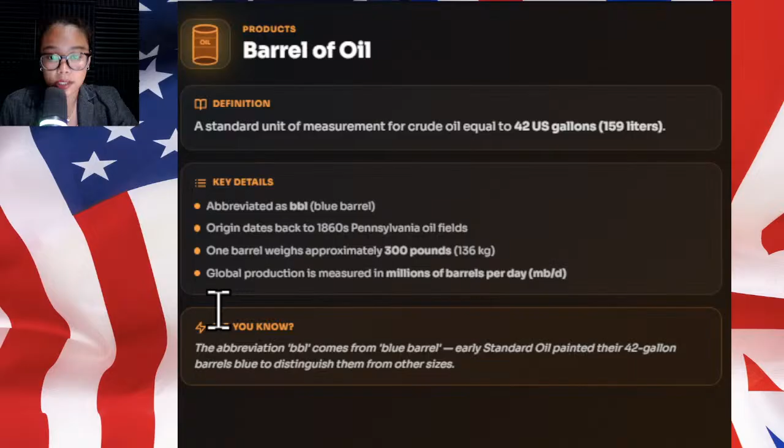And then next to that, we have blowout preventer. When we say blowout preventer, this is a critical safety device. BOP. This is very large. This is a specialized valve installed at the wellhead at the top. Okay, so it is more like an ultimate safety switch for an energy well. So its primary job is to seal, to control, and to monitor oil and gas wells, so that we can prevent uncontrolled release of pressure, which is known as the blowout.

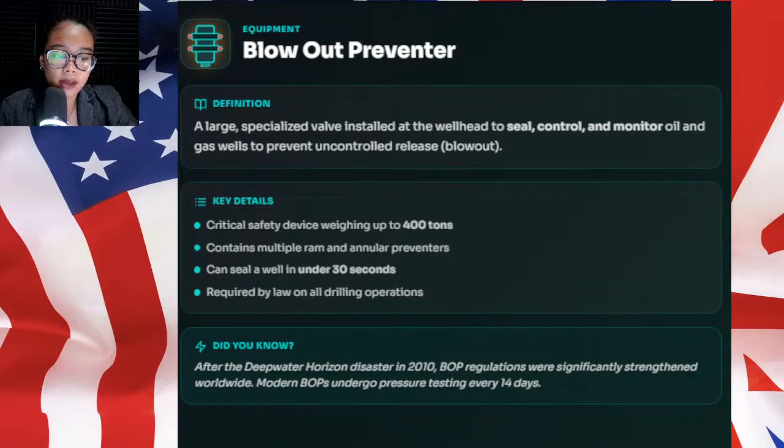And then next to that, we have the casing head gas. Now, the casing head gas is natural gas produced from an oil well. So, it exists as a gas that is dissolved in crude oil while it's deep underground under high pressure. Okay? So, it is really different from dry natural gas used to heat homes. It is often described as rich or wet because of its chemical makeup. Okay? So that's the casing head gas.

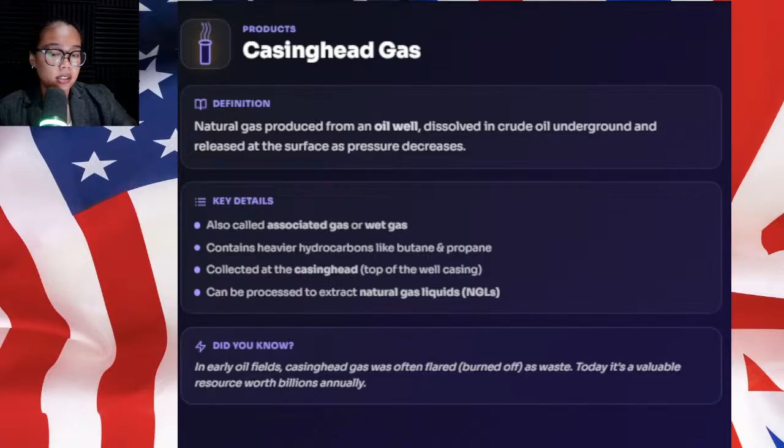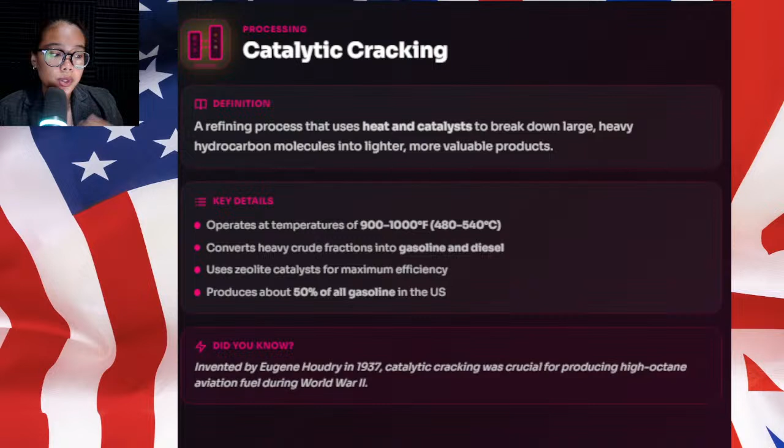And then next we have catalytic cracking. Now, when we say catalytic cracking, that is a high-tech refining process which is used to break down large, heavy hydrocarbon molecules into smaller, lighter, and more valuable products. Okay, so that is catalytic cracking.

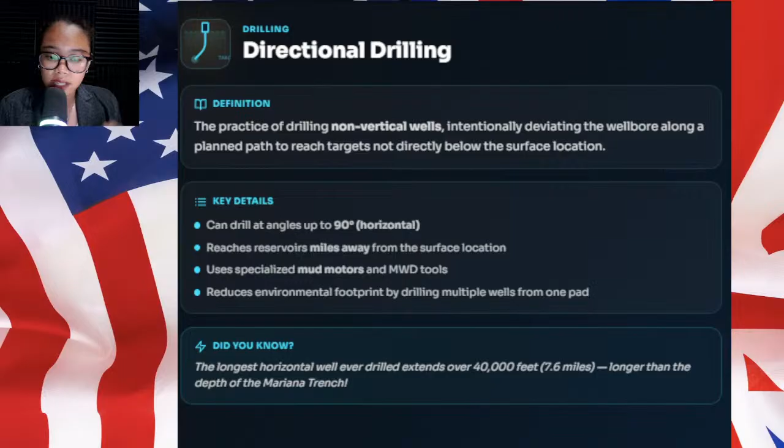Next, we have directional drilling. Now, when we say directional drilling, that is from the name itself. Of course, we do drilling here. So it's the practice of drilling non-vertical wells, which is unlike traditional methods that only go straight down. This technique involves intentionally steering the wellbore along a planned path to reach targets that are not directly below the surface location. So it's more flexible in that way. Okay, that is directional drilling.

Now, we've also established that there are three types of drill bits, right? We have the roller cone bits, fixed cutter or PDC bits, and also the diamond bits. And of course, we've already talked about that in our past videos. So if you want to know more about this one, or if you want to be refreshed, you can always look back at our previous videos, okay?

Next is the drilling fluids. Now, drilling fluids are specially formulated liquids that are circulated through the drill string and wellbore during drilling operations. They are far more complex than simple water because they are engineered mixtures of chemicals, used for efficiency-boosting tasks, especially deep underground, which is our focus because that's where we get the oil and gas. So, yeah, that is on drilling fluids.

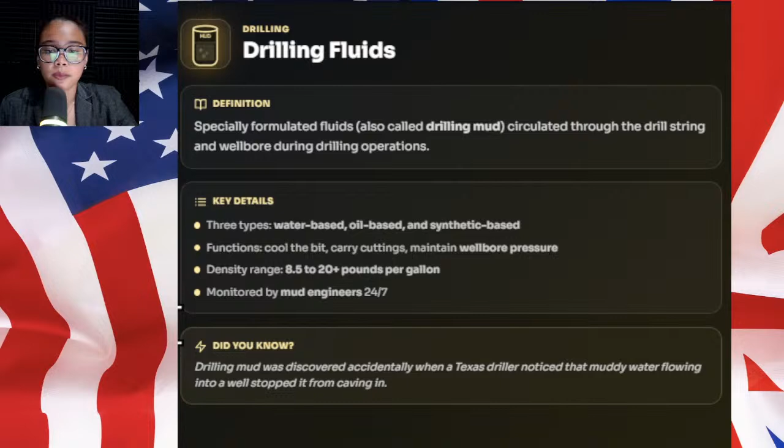This is for cooling, especially when the drilling tool is drilling the rocks. So if you try to drill through thousands of feet of solid rock, it creates immense friction, which of course will heat the drilling tool. So it needs cooling, and the drilling fluid will cool the bit. Okay. And of course, it will also help lubricate so as to make it easier to use the drilling tool.

Okay. So next we have the engine oil. Now, engine oil is either petroleum-derived or synthetic, and it is used in internal combustion engines to reduce friction, cool components, and protect against wear. Well, how do you call that? Engine oil is, of course, the liquid that you're getting from all those steps that you are taking.

Sorry, excuse me for that. Anyway, we're going to continue.

Engine oil shows how the oil and gas industry touches our daily lives, because of course there are different ways we can use oil and gas. So it allows us to really learn how important engine oil is in our daily lives, because once this particular economic product is affected, it will affect every other product.

Okay, it will greatly influence things because, of course, oil and especially gas is the main source of power for transportation. A truck or any kind of transportation vehicle cannot move without it, right? So with that in mind, it will have a very great impact on the lives of the people.

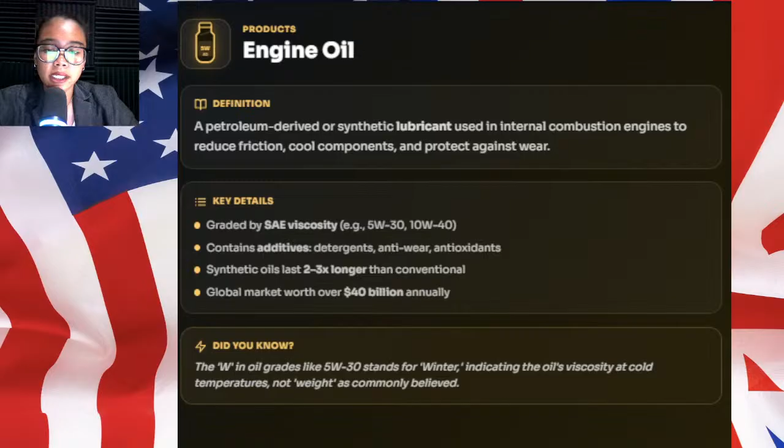So that is why we need to really know what engine oil is. It's a specialized lubricant. So whether it is in a car, a ship, or massive generators at maybe a train station, engine oil really performs several essential roles to keep equipment healthy. For example, it reduces friction in components. It is a protective barrier that extends the life of the engine. It prevents wearing, and of course, it contains advanced additives. That is engine oil.

Next, we have fault trap. Now, when we talk about fault trap, it is a geological formation where a fault, which is the fracture or the crack in the Earth's crust, displaces rock layers. So this movement creates a physical barrier or a seal that traps oil and gas in a reservoir. So that is a fault trap. Okay.

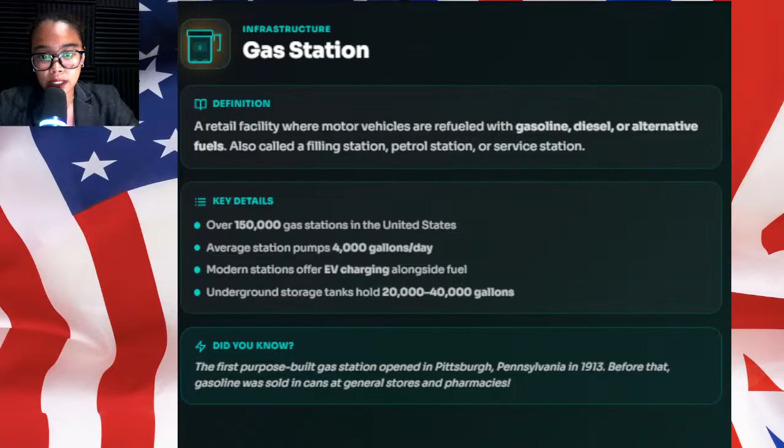Next, we have the gas station. Oh, we already know this one. Gas station is a retail facility where motor vehicles are refueled with gasoline, diesel, or alternative fuels, also called a filling station, petrol station, or service station.

Next, we have the gusher. Now, gusher, it is an uncontrolled release of crude oil or natural gas from a well after pressure is encountered, causing oil to spray violently into the air. So this is what happens when the gas is not controlled properly. It gushes basically, so it sprays violently into the air. It often reaches hundreds of feet above the drilling rig. So that is a gusher, a blowout basically. This is what the BOP is trying to prevent, a blowout, because this is not safe.

Next, we have the injection well. Now, an injection well is a well used to inject fluids such as water, gas, or chemicals into an underground formation for enhanced oil recovery or waste disposal. Unlike the traditional production well that brings oil to the surface, an injection well works in reverse, pushing substances down into the earth. So it's more of a dual purpose. These wells are used for enhanced oil recovery, or EOR, or for the safe disposal of waste fluids.

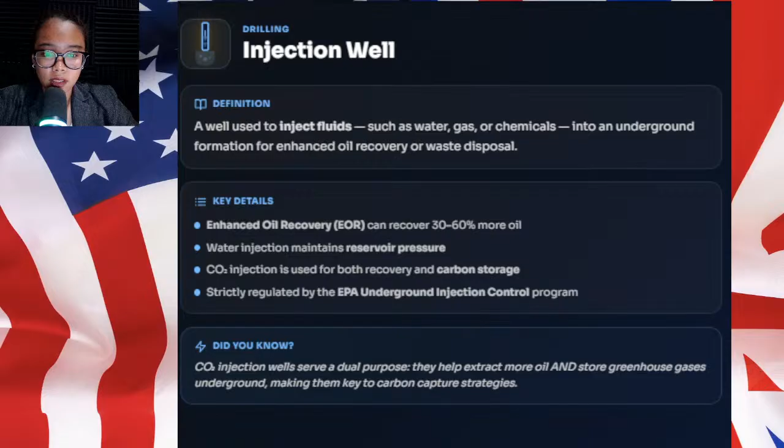Next, we have liquefied natural gas, or LNG. It is natural gas that has been cooled to an extremely low temperature, usually negative 162 degrees Celsius or negative 260 degrees Fahrenheit. This extreme cooling process changes the gas into a liquid state. So that is liquefied natural gas.

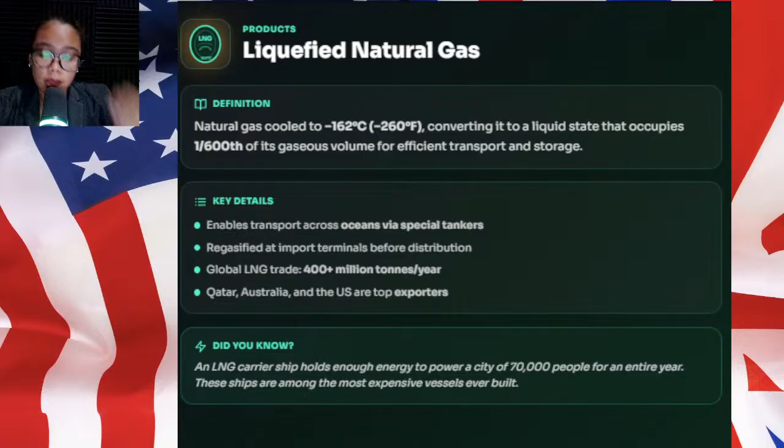Because natural gas is usually just a gas, it is typically moved through pipelines. However, you can't build a pipeline across an entire ocean. So this is where LNG technology becomes vital for global energy. It enables transport across oceans by special tankers, where you store this LNG or liquefied natural gas.

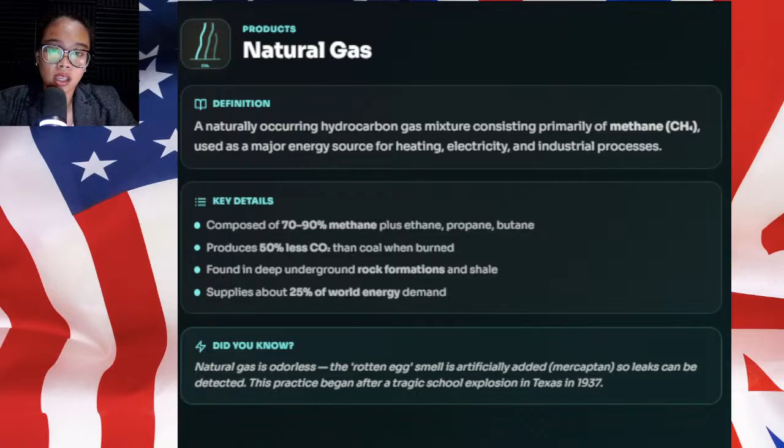Next, we also have natural gas. Natural gas is one of the most significant energy sources on the planet. It serves as a primary driver for heating, electricity generation, and complex industrial processes. As a naturally occurring hydrocarbon gas mixture, it is a cornerstone of the global transition toward cleaner energy production. Natural gas is primarily composed of methane, typically making up 70 to 90% of the mixture.

And in its natural state, methane is completely odorless. It doesn't have any odor. To ensure public safety, a specific chemical is added to the gas so humans can detect leaks. Because if it is odorless, it is much more dangerous, because we cannot detect leaks, since we cannot smell it. So for public safety, a specific chemical is added for it to have an odor, so that we can detect it by smelling.

And then we also have oil field, oil rig, oil well. Okay, we're going to continue. This is the last word that we discussed last meeting, natural gas. So we're going to continue with another set of terms this evening.

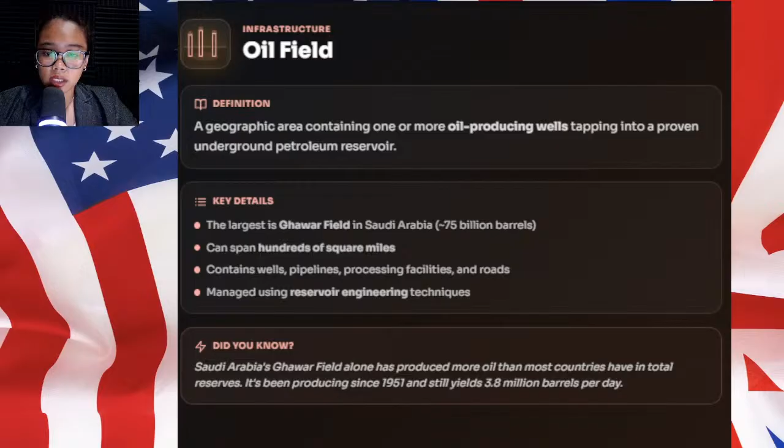Saudi Arabia's Ghawar field alone has produced more oil than most countries have in total reserves. It's been producing since 1951 and still yields 3.8 million barrels per day. That's how massive the oil field is in Saudi Arabia. That is why it is usually the main source for importing or exporting oil. So again, oil field is the location where we can find stored oil. Okay? That is oil field.

Next, we have oil rig. Oil rig is, as defined here, the complete set of equipment and structures used to drill a well, including the derrick, engines, mud system, and all associated machinery. So it is really an essential physical infrastructure used to drill a well and extract energy resources from deep within the earth's crust. Far from being just a single machine, an oil rig is a complex, complete set of equipment, structures, and machinery designed to operate in some of the most challenging environments on the planet.

So, what is an oil rig? The term oil rig refers to the entire system used for drilling, which includes the iconic derrick or tower, powerful engines, a complex mud system, and all associated mechanical components. There are two main categories: rigs are generally classified as either land rigs or offshore rigs. As for their operating hours, these are high intensity environments, so they always operate 24/7 using 12-hour crew shifts to ensure constant progress.

And building and operating a rig is incredibly expensive. This is really a massive investment because, as far as my research goes, a typical land rig can cost between 15 to 30 million dollars, while advanced deepwater offshore rigs can cost over 600 million dollars. That's a big difference, okay? Still, both are expensive, but that is to be expected. Now, how does a rig operate?

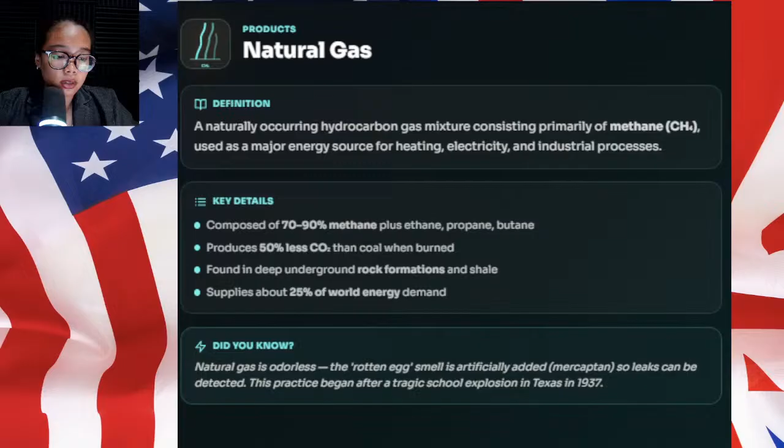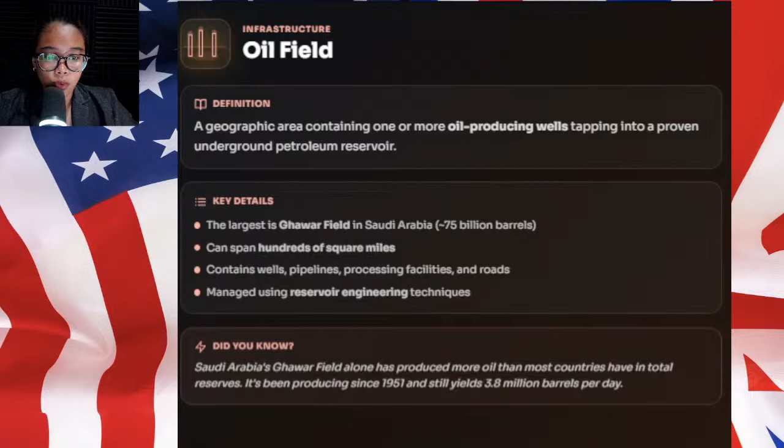Are we going to continue? So far, we've already talked about oil field, again, the large area, oil rig, oil well, and petrol. So how many? One, two, three, four. Let's continue with pipeline, and then we'll do a break after, because again, the terms are really overwhelming if you're not familiar with these ones. So we try to really do breaks in between, so that your brain is still ready to absorb everything, especially if properly rested. Anyway, we're going to continue with pipeline.

Pipeline, as defined here, is a system of pipes used to transport crude oil, natural gas, and refined products over long distances from the production sites to refineries, storage, and distribution points. Basically, the pipelines serve as the circulatory system of the global energy industry, because they connect production sites like an oil field to refineries, storage hubs, and of course, final distribution points. The scale of modern pipeline infrastructure is really staggering; it requires advanced engineering just to cross deserts, mountains, even urban environments. So there is a massive network of it.

The United States alone contains over 2.6 million miles of pipelines. That is totally large, no? Large scale transmission pipelines can reach up to 48 inches in diameter. So that's the pipe dimensions. And the flow speeds: liquids and gases move at different rates. Oil typically flows at 3 to 8 miles per hour, while natural gas moves much faster at 15 to 25 mph.

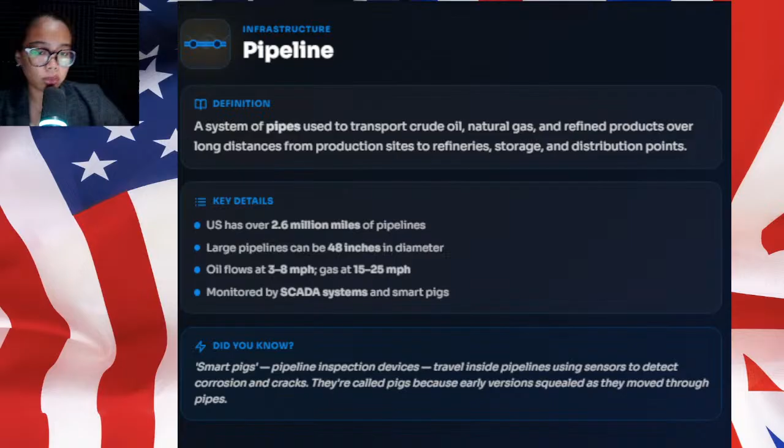Now, the SCADA system is the system that detects pressure changes or leaks in real time. SCADA is an acronym for supervisory control and data acquisition, which is used to monitor these pipelines 24/7. Smart pigs, again, are high-tech inspection devices that travel inside the pipes using sensors to detect any cracks or corrosion.

Just as a blowout preventer, or BOP, manages pressure at the wellhead to prevent a gusher, pipeline stations use valves to maintain safe flow pressures, because it would be very unfortunate if the pressure were not controlled. A pipeline is not standalone; it does not act alone. Pipelines are integrated with other drilling and recovery technologies.

So we do extraction, we do collection. There are also support systems, and of course environmental management, because we always do our best to not harm the environment, since we're getting the oil and gas from the environment. So there's always environmental management. Again, that is pipelines. Next, we have the platform.

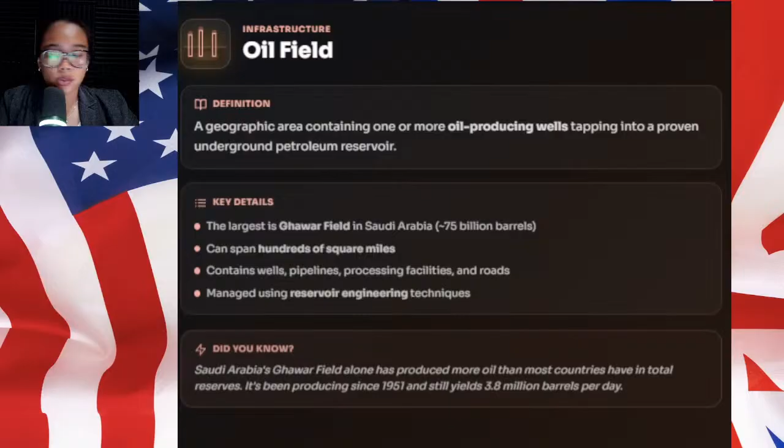So far during this session, we've talked about oil field, oil rig, oil well, petrol, pipeline, and platform. So there are six complicated terms. Though the words used are usually simple and easy to understand as common words, if you try to connect them with oil and gas vocabulary, it really is complex. Okay, so there are still remaining words left. We're going to continue with our last discussion tomorrow.